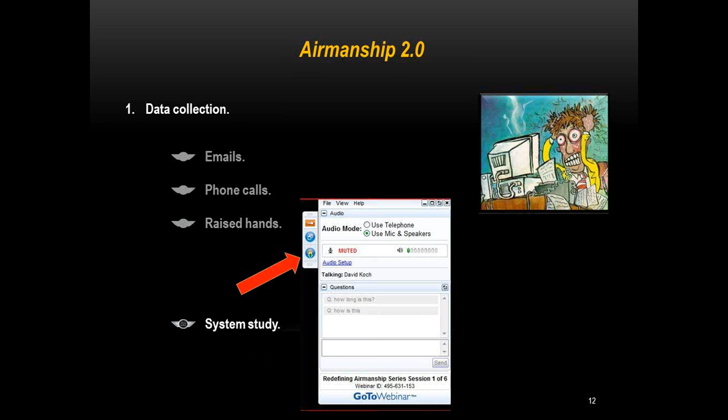So I eventually get to that. In fact, that's how we caught it. So I collected all that data, and then I also studied the system, the GoToWebinar system, to see what the problem was. Next step, as you recall, in a safety management system is data analysis.

So I crunched all that data and I looked at the system, as I mentioned. And here you can see a screenshot of what I see in my control panel. You all have a smaller version of this on your screen, or you should. But here's my icon to tell me my mic is hot, right there, that little green square with the white mic in it.

Here's another screenshot that shows me that mic icon when I have it muted. So it's not green now, it's gray. So it doesn't catch your attention. Pretty poor engineering in my opinion. When I have it muted, it's only gray and it doesn't catch my attention so that I know that I've done that.

So number 3 then, since we've analyzed the data, is to identify the hazard. The hazard is that I mute the mic button to clear my throat or take a sip of water, and I forget to open it back up again, and so we have lost comm. Everybody's saying, say again, and it was due to pilot error.

So we're going to devise a fix, working through our safety management system here. And the fix that I've decided to try is what I call the good old 3-holer trick. The 727, the Boeing 3-holer. I flew these for United Airlines starting in 1968, started out on this airplane as a second officer, and that's where I reached back in my memory bank, my Airmanship 2.0 bag of tricks, and pulled this one out, this fix that I'm devising here for this hazard that we've identified.

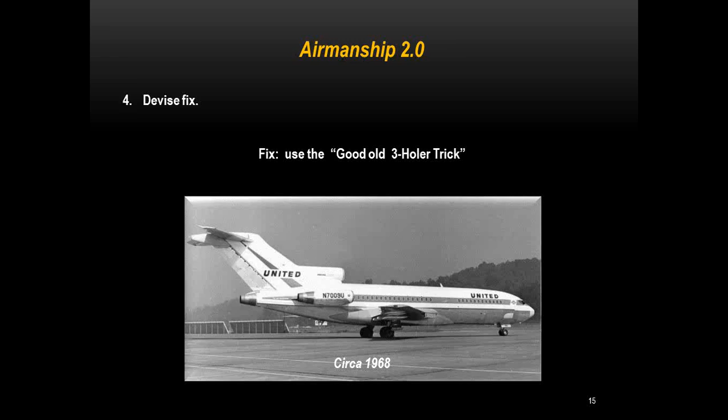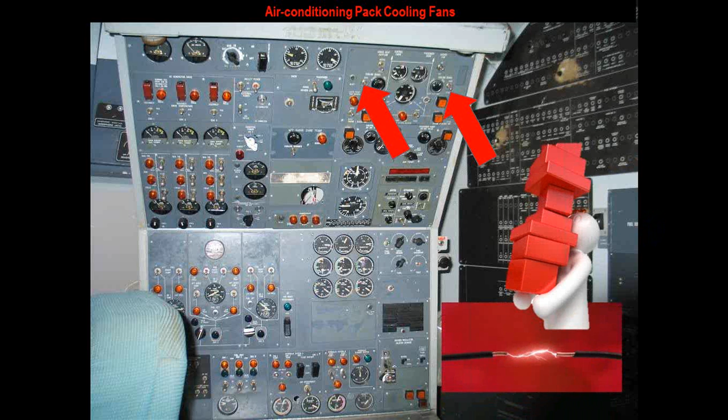These 2 switches are air conditioning pack switches, and attached to those air conditioning pack switches are cooling fans that are activated if those switches are on anytime the flap handle is moved from the 0 or the full up position. So anytime you start to extend the flaps, those air conditioning pack cooling fans come on, and they are tremendous users of electricity, take a lot of power.

So if we lost a generator on the 727, the procedure called for us to turn one of those switches off before we extended the flaps. If we lost 2 generators, procedures called for us to turn both switches off before we extended the flaps so that the cooling fans wouldn't come on.

So that was a real easy thing to forget. You might lose a generator at the beginning of a flight. You fly a long flight. Now you've got to remember to turn off those air conditioning pack switches before you extend the flaps. So what we did to remediate that hazard was, over the flap handle, we would put a coffee cup, just a paper coffee cup, upside down over the flap handle.

Whoever was going to be extending the flaps on that particular leg knew if they reached for them to extend them, they'd find the coffee cup, and then they would remind the second officer to turn the air conditioning pack switches off. So it worked very effectively.

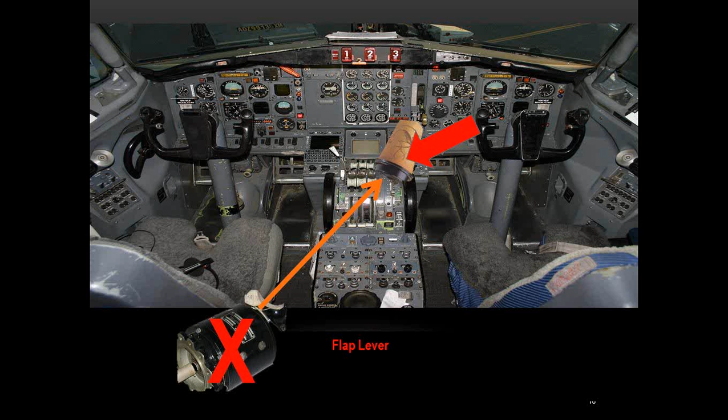I don't know who came up with this one first, but it was taught to us in recurrent training, actually initial, then recurrent. We all used it on the airplane as our gouge whenever we were handling a loss of generator situation. And of course, the big thing was to make sure you have those pack switches off.

So the fix I've devised, because I'm trying to keep myself from leaving the mic muted if I do mute it for some reason, I've decided to place in front of my monitor this Airmanship Challenge Completion Award that I happen to have here in my office. Whenever I have it muted, I just place this in front of the monitor, so I shouldn't miss that when I'm going to speak again and open up the mic.

All right, well, the next step is to implement the fix. So that's what we're doing this evening. I've got my Airmanship Challenge Completion Award here in front of me, and I'm going to put it in front of my monitor whenever I mute the mic.

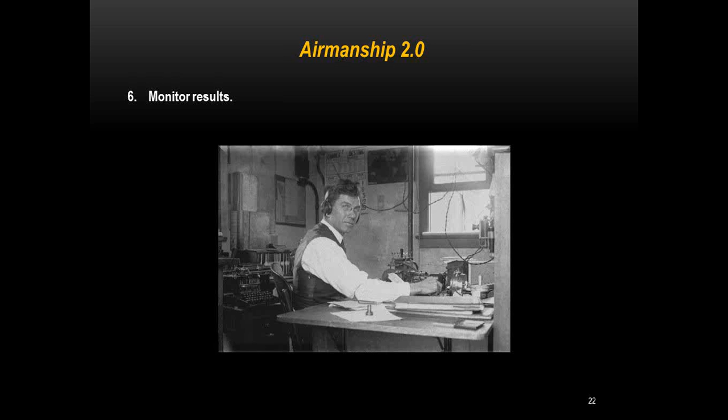Now the next step in the safety management system is to monitor the results. So you folks are the monitors, and again, if you have a problem, or don't hear anything for a while, please click on the raise your hand icon. You can email me, send me a message, or call me if you're not hearing anything.

So that's how a safety management system works under Airmanship 2.0, and we can use that same system in our flying to keep us safer and to make it easier for us.

A couple other things I want to tell you about Airmanship 2.0 briefly before we get into the case study this evening: I want to point out that we always use the Kern Airmanship model when we're talking about Airmanship 2.0. In fact, the Kern Airmanship model is the prism through which we view Airmanship 2.0.

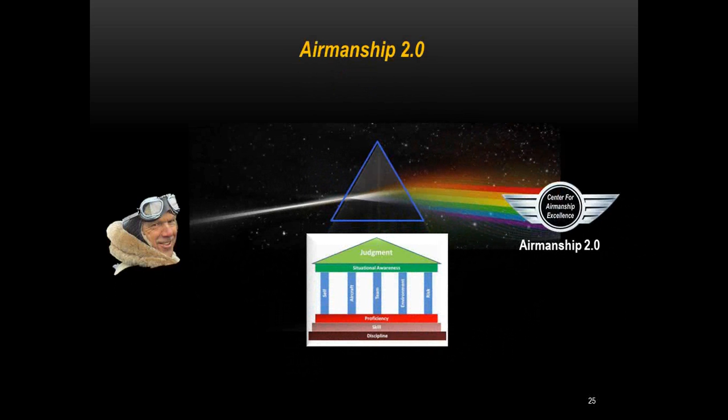Another way to look at Airmanship 2.0 in the Kern Airmanship model is to look at each one of the elements in the model. Here we can see we have 3 bedrock principles: flight discipline, skill, and proficiency. We have 5 pillars of knowledge: knowledge of self, aircraft, team, knowledge of environment, and knowledge of risk. And upon those 5 pillars of knowledge rest the desired outcomes, the capstone outcomes of situational awareness and judgment.

So really, the Kern Airmanship model is the scaffold upon which we build our airmanship skills and capabilities. Another way to look at Airmanship 2.0 is that it's doing it right. It's flying right. It's doing all the things that should be done to make the flight enjoyable, more rewarding, and safer.

Another big part of Airmanship 2.0, and you're kind of participating in an element of that this evening, is a continuous airmanship development plan. Every pilot who practices Airmanship 2.0 has a continuous airmanship development plan by which they can continuously improve their airmanship. I like to quote Vince Lombardi here: 'Perfection is not attainable, but if we chase perfection, we can catch excellence.' And that's what we're after here, to be excellent airmen.

I mentioned you're actually participating in a continuous airmanship development plan by attending the Wings Program briefings, because the Wings Program, the proficiency program, is a big part, or should be a big part, of everyone's continuous airmanship development plan.

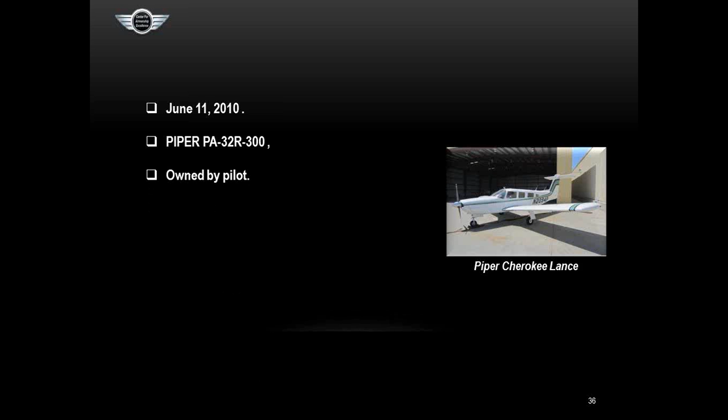It was owned by the pilot. It was a Part 91 operation. No flight plan was filed on the accident flight. There were 4 fatalities, all occupants of the aircraft, the pilot, and 3 passengers. The accident pilot was ATF Special Agent Jeffrey Ulrich. He was 50 years old. He had a private certificate with an instrument rating. 3rd class medical, issued 1.5 to 2 years before the accident. He had a restriction not valid for night flying, daytime only.

He had 2,150 plus hours, so he's an experienced aviator. 5.7 hours in the previous 30 days and 34.4 hours in the previous 90 days. So I would, from that particular information, assume that he was fairly proficient in the normal flying of his airplane. Passengers: his wife Ronnie, who was aged 47, daughter Alexa, age 15, and daughter Carly, age 5.

The aircraft, as I mentioned, was PA-32R-300. The N number was 7699er Foxtrot. Was manufactured in 1977, so it was 33 years old at the time of the crash. Total airframe hours, 4,389, so it was getting up there, relatively speaking. Had a Lycoming IO-540, 300 horsepower, so it had a lot of horses. The engine had been overhauled just 155.6 hours prior to the accident. Engines can be a problem no matter where they are in the life cycle, but this one at least was fairly fresh out of overhaul.

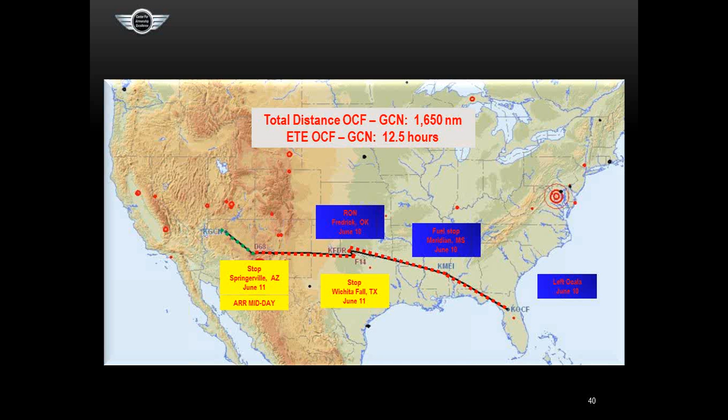They arrived in Springerville about midday. They were going to continue on up to the Grand Canyon. So total distance from Ocala out to the Grand Canyon, 1,650 nautical miles, 12.5 hours flying time. I would imagine this was a long-planned family trip, taking the kids out to the Grand Canyon. What a way to see it. What a way to see the country. I imagine they were just having a really good time when they arrived in Springerville for that fuel stop.

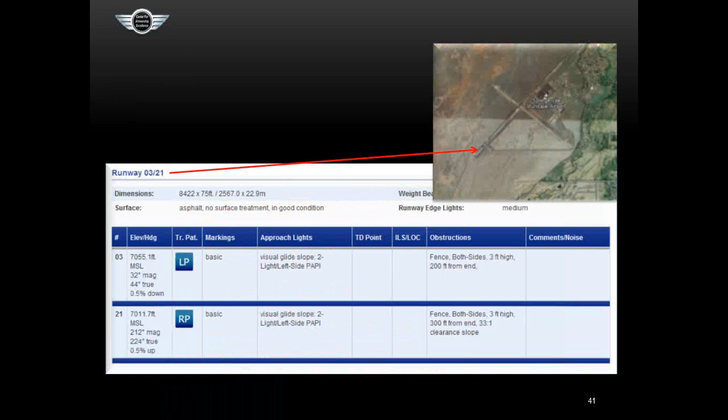Just take a little closer look at the airport, Springerville, where the accident occurred. You can see there's 2 runways at Springerville. This is runway 3-21, nice long runway. Had 8,422 feet, paved, good condition. 0.5% downslope, so a good runway to use. However, it was NOTAM closed at the time of the accident.

The other runway there, 11-29, it was much shorter, only 4,603 feet, and it had an upslope of 0.2%. Now that might not sound like much, but when performance is important, any upslope is a major detriment to performance. You might also note that the airport elevation here, at least the runway end elevation, 7,032 feet, so they're up there pretty good.

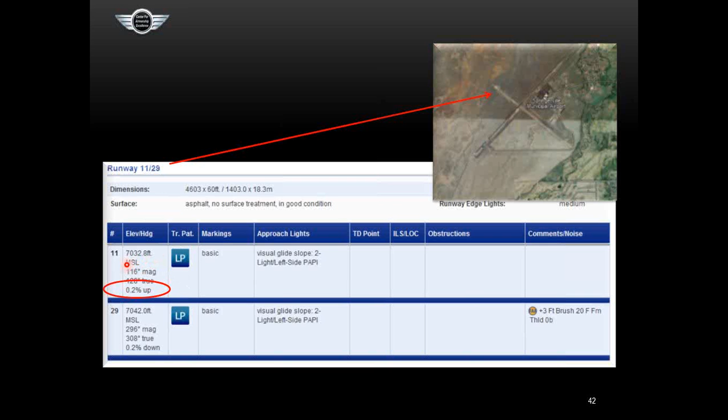On the turnaround there at Springerville, the records indicate that the pilot took on from a self-serve pump 76.4 gallons of 100 low lead. The aircraft held 98 gallons maximum, so that's pretty close, I would think, if he was topped off before he left Wichita Falls, and he had 20 gallons or so left there. 22 gallons is about right. A couple hours flying time, good margin. But he more than likely topped it off the way the NTSB figures it here.

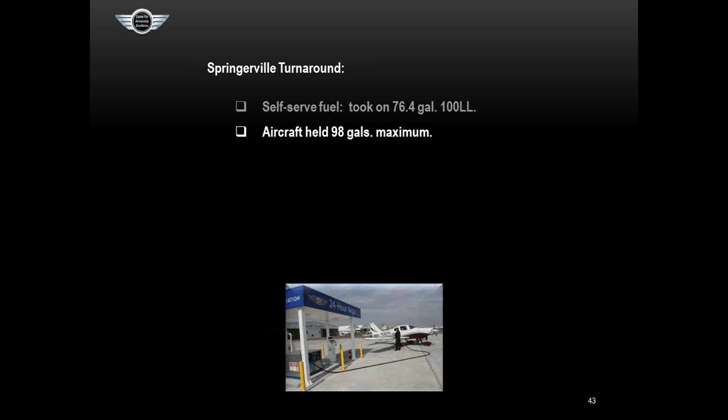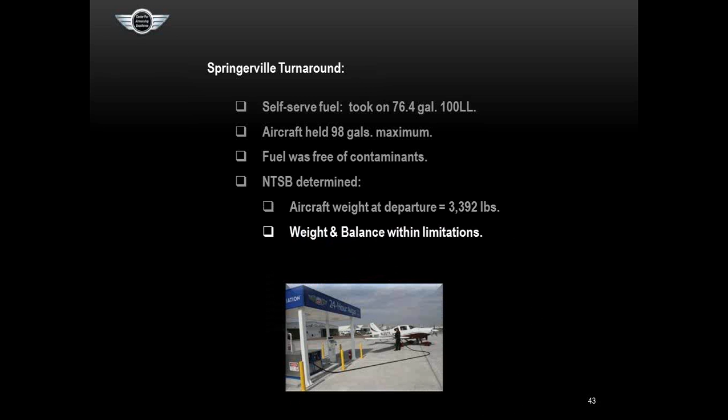But they did have the record, and they added 76.4 gallons. They did check the fuel. It was free of contaminants, so that wasn't the problem. The NTSB determined that the aircraft weight at departure was 3,392 pounds, and the weight and balance was within limitations. It was close to max gross. I think max was 3,600 pounds, but it wasn't at max, and it was in balance.

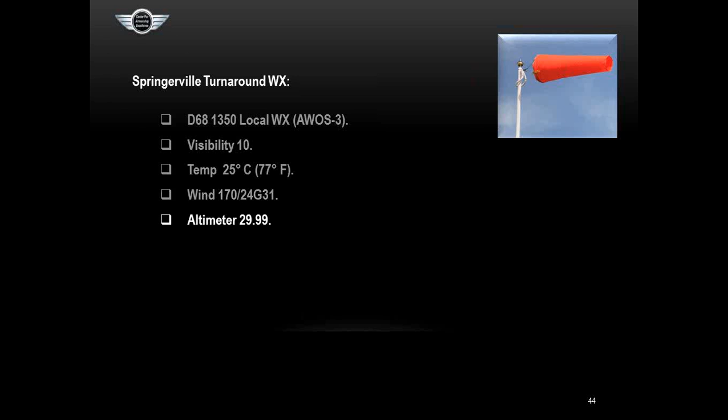The weather at the time of the Springerville turnaround at D68, that's Springerville, 1350 local time. It was recorded by an AWOS-3. Visibility 10 miles. Temperature 77 degrees Fahrenheit, so not terribly hot for Arizona in the summertime, but that is pretty high, 7,000 feet. I used to live in Tucson. I lived a couple thousand feet up, and it got hot in the summertime, even up at that altitude, but here's 77. The wind was from 170 degrees at 24, gusting 31. Remember, he's using runway 11. Altimeter 29.99. Density altitude 9,700 feet.

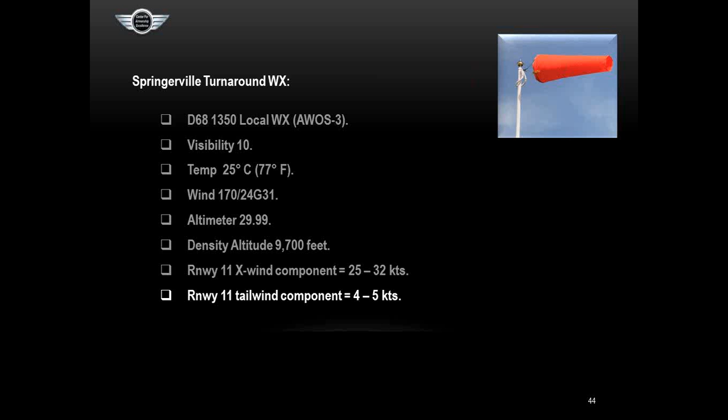The runway 11 crosswind component was computed by the NTSB to be 25 to 32 knots. That's the crosswind component. It had a tailwind component. It was gusting around, but most of the time it had a 4 to 5 knot tailwind component. So remember, you had that upslope on that runway. Now he's got a tailwind on the runway and a really ferocious crosswind to deal with. Must have been an interesting landing if he used 11 like he should have. The NOTAM said there was construction being done on the other runway, so I would assume he landed on 1-1. But we know that his takeoff was on 1-1 on this accident flight.

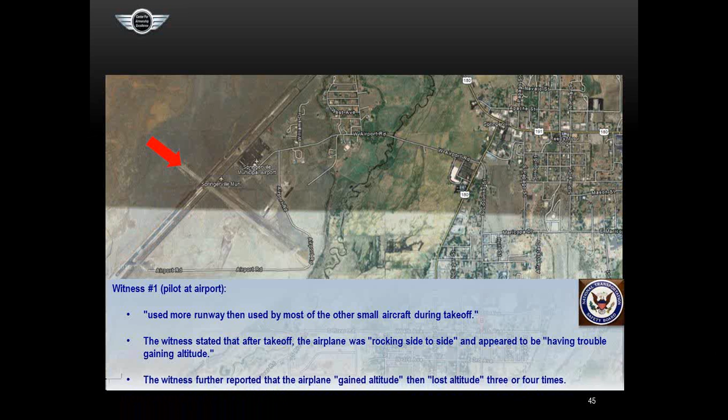All right, there were several witnesses to the accident. Witness number 1 was a pilot at the airport. He saw the airplane departing runway 11. And the quote was, "He used more runway than used by most of the other small aircraft during takeoff." The witness stated that after takeoff, the airplane was rocking side to side and appeared to be having trouble gaining altitude. This is a real strong indication that he was flying in ground effect and couldn't get out of it. The witness further reported that the airplane gained altitude, then lost altitude 3 or 4 times. Another good indicator that he was struggling to get out of ground effect.

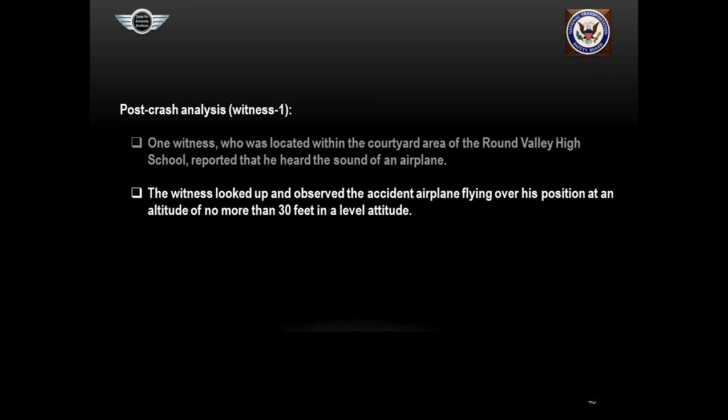Post-crash analysis, the NTSB interviewed a witness that said he was located within the courtyard area of the high school, and he reported that he heard the sound of an airplane. And then he looked up and observed the accident airplane flying over his position at an altitude of no more than 30 feet in a level attitude. The witness stated that he ducked for cover and subsequently heard the sound of the airplane impact the side of the school building. The witness said that the engine was wound up and seemed to be running strong.

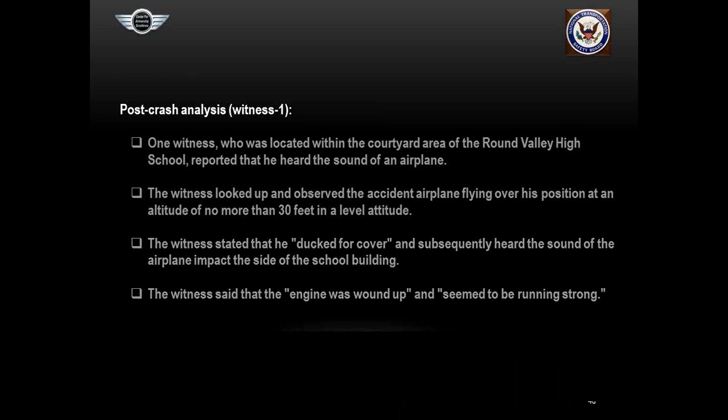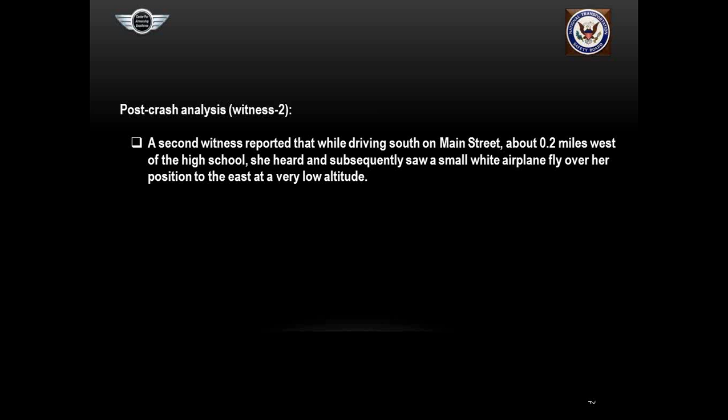A second witness reported that while driving south on Main Street, about 0.2 miles west of the high school, she heard and subsequently saw a small white airplane fly over her position to the east at a very low altitude. The witness stated that the airplane appeared to be losing altitude very fast as it flew over her position, and that it did not sound like the engine was sputtering or missing. The witness turned onto a nearby street, heading toward the high school, and observed the airplane turn its wings at an angle when it crashed into the roof.

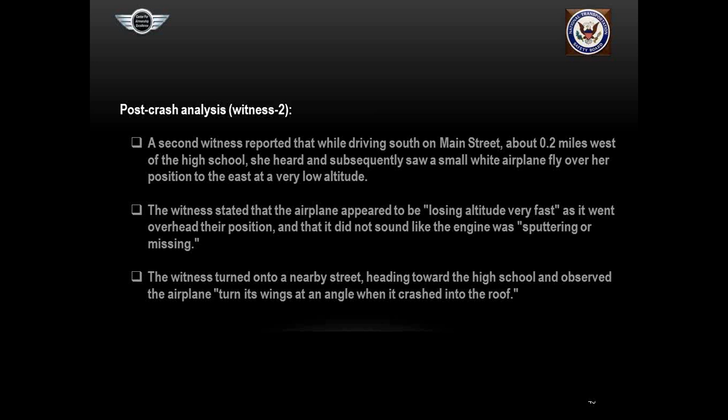But remember, it hit the tree first, so he might have not had good control by that point. So the question here is, did he stall, spin, or did he still have control of the airplane? He was just trying to avoid hitting something there.

A current copy of the aircraft's weight and balance, which would include empty weight of the airplane, was not located. Now, again, everything burned. They recovered a lot of the contents of the airplane, a lot of different paperwork. This guy was an ATF agent. There was a lot of ammunition on the airplane that cooked off for quite a while. They found several guns in his luggage, and they found some other documents, but they didn't find the weight and balance. So it might have been there, it might not. If it wasn't there, that, to me, is something to look at, because it's supposed to be there, right?

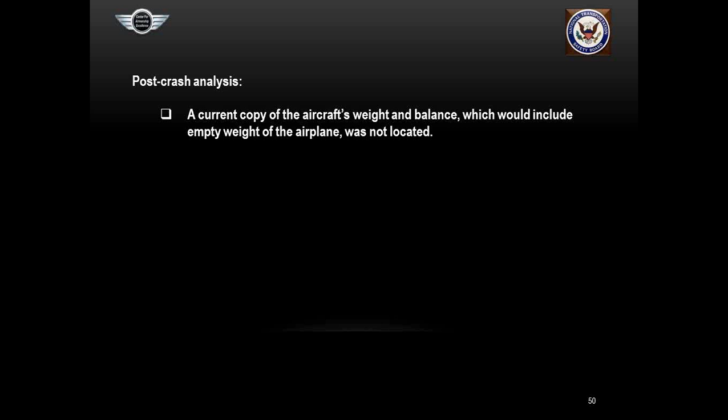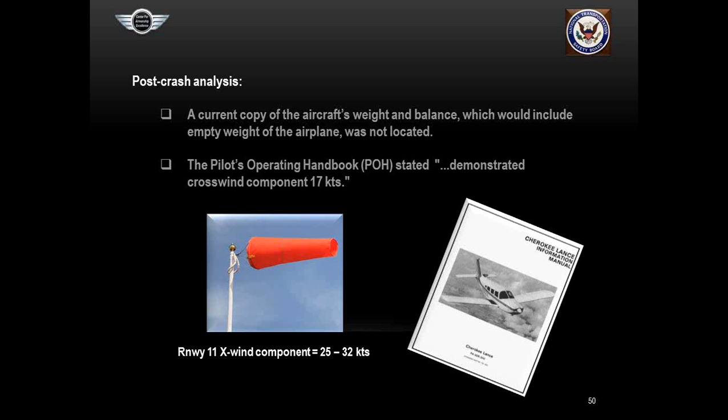The pilot's operating handbook stated a demonstrated crosswind component of 17 knots, and as we saw earlier, the runway 11 crosswind component was 25 to 32 knots. So if he remembered that, not a limitation, but it's a good personal limitation to have, probably even lower than that for most guys. But if he knew about it, he certainly ignored it, because he took off with a real strong gusty crosswind.

Stand by just 1 second. I want to check something.

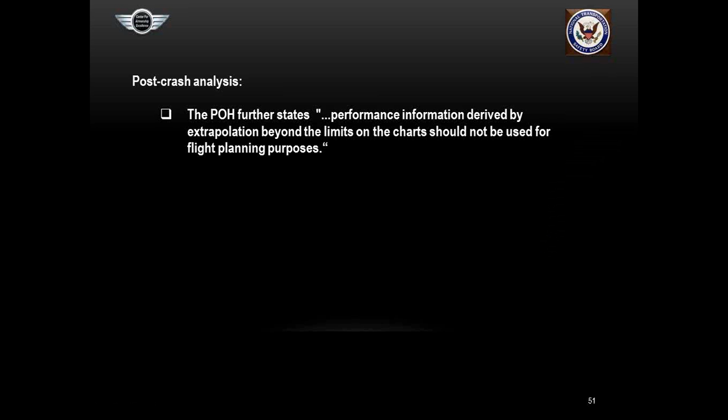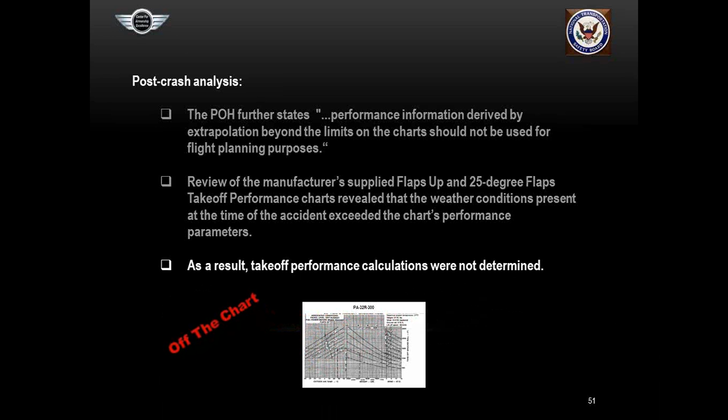Okay. The POH further states, performance information derived by extrapolation beyond the limits of the charts should not be used for flight planning purposes. So if it isn't on the chart, don't use it. Don't try to extrapolate. Don't try to figure it out. Review of the manufacturer's supplied flaps up and 25-degree flaps takeoff performance charts revealed that the weather conditions present at the time of the accident exceeded the chart's performance parameters. As a result, takeoff performance calculations were not determined. The data was off the chart.

Using the manufacturer's gear up and gear down performance calculation charts and the reported weather condition and maximum gross weight of the airplane, the climb performance with the gear in the down position was calculated to be about 90 feet a minute. So the book said the airplane should have been able to climb about 90 feet a minute with the gear down. With the gear up, it was calculated to be 410 feet per minute. Now that 410 feet per minute, by the way, if you look at an instrument departure procedure, the climb gradient required at about 120 knot ground speed, as I recall, is about 400 feet per minute to clear any obstacle out there in the departure path. So if he had the gear up, even at this high density altitude, he should have been able to climb.

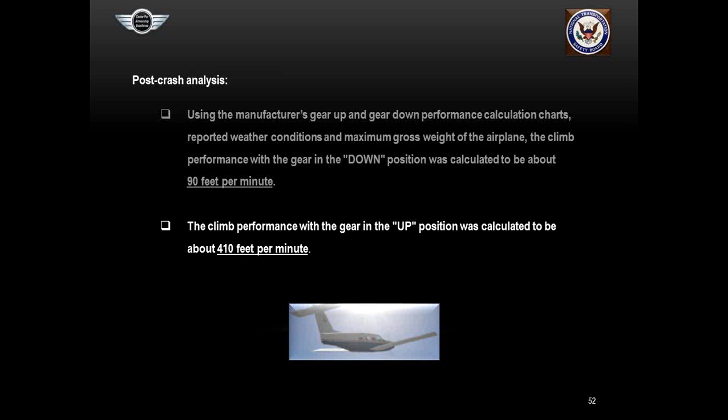And I can just visualize that. Got my family on the airplane. I just took off. The airplane's not climbing like I was hoping it would. I'm trying to fly it in ground effect and get it going fast enough to get it out of ground effect. I'm dodging things that are sticking up in the way, losing performance every time I do that, and just trying to get high enough to clear the highest thing out there in my departure path. Be a pretty tight situation.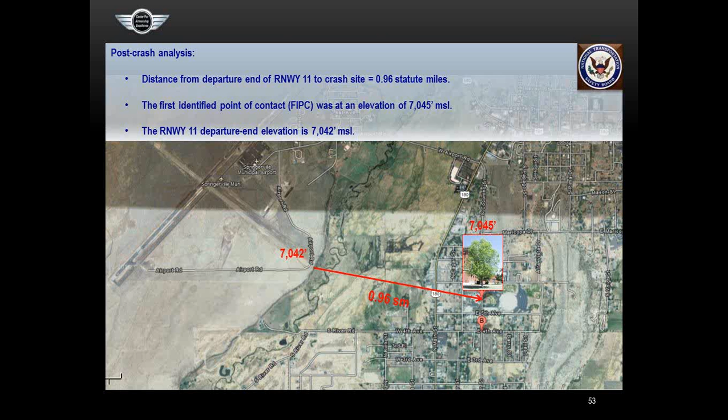Again, his first identified point of contact, the NTSB calls it, was that tree on the campus of the high school, and its elevation, they went out and checked it, was 7,045 feet MSL. That was where he hit the tree, that 7,045. The departure end of runway 11 is at 7,042 feet. So his net gain in altitude after takeoff was 3 feet.

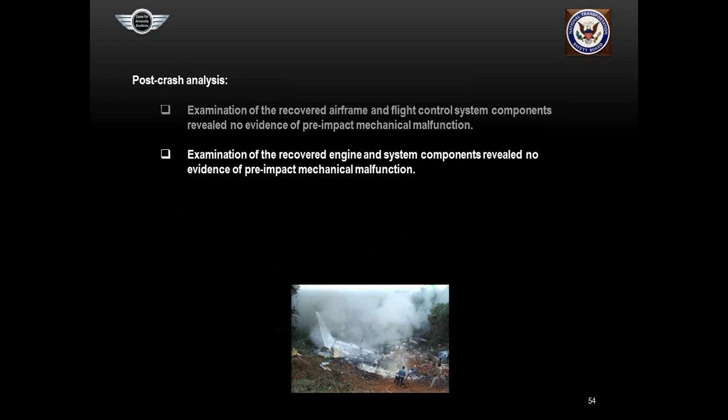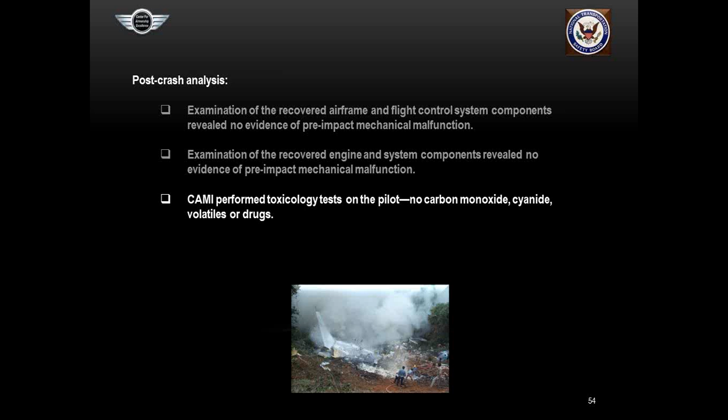Examination of the recovered airframe and flight control system components revealed no evidence of pre-impact mechanical malfunction. Examination of the recovered engine system components revealed no evidence of pre-impact mechanical malfunction. CAMI out at Oklahoma City, FAA, performed toxicology tests on the pilot and found no carbon monoxide, cyanide, volatiles, or drugs. So evidently he wasn't impaired by any of those things, although it could have been impaired by stress, could have been impaired by fatigue, other things will impair you besides drugs and alcohol and so forth.

The NTSB's probable cause that they issued: the pilot's operation of the aircraft outside of the manufacturer's specified performance limitations, which resulted in the pilot's failure to maintain clearance from buildings and terrain during initial takeoff climb. In other words, the density altitude got him.

All right, well, let's see if we can identify some of the links in the error chain that led to this accident. And to do that, I'm going to use the technique we used in the last webinar where we use what we call a whiteboard, but to do that here in this situation, I just use a Word document. So there's our whiteboard. So I'm going to open up the roster, and I'd like to ask you to contribute your thinking on links in the error chain that led to this accident. Just raise your hand if you have identified a link and you'd like to share it with us.

Well, either you all have gone to sleep or gone out to watch television.

Okay, here's Paul Galuzzo. Paul, can you hear me? Yes, I can. Go right ahead. I would say exceeding the crosswind component for the POH.

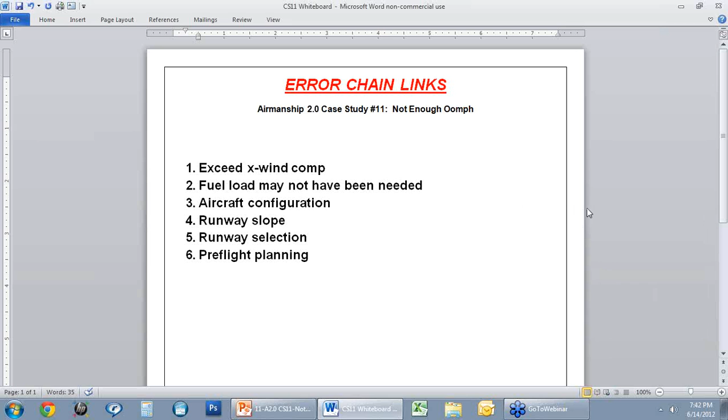And you're right, if he had known about it before - I've closed your mic, Larry, so don't get feedback - if he had known about it before, then he might have considered not using that as the fuel stop if he'd looked at any kind of performance figure. So very good, that's a good one, Larry.

All right, I'm going to scroll through again here a little bit more. Stephen Fisher, Stephen, I've opened up your mic. Okay, I don't hear you, Stephen, so close that again. Sometimes that's just the hookup, doesn't work.

All right, I don't see any more hands up. Oh, here's one more, Dean Cap. Dean, go ahead.

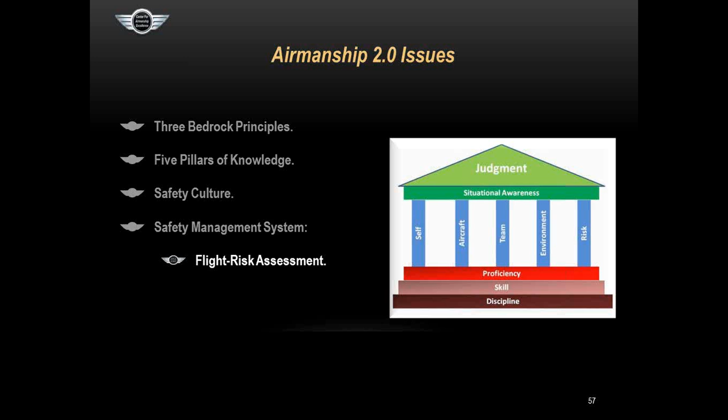First of all, a safety management system incorporates a formal flight risk assessment process, a tool, a system, people. I use what's called a FRAT, Flight Risk Assessment Tool, before every flight. AOPA has one online that's usable, not the greatest, but what it does is get you to identify, look at, and consider all the normal risks, all the known risks we can potentially see on every flight, assess them, and if they're at a high enough level, find ways to remove or mitigate it.

Also, if he was practicing Airmanship 2.0, he would have had thorough pre-flight planning because he would have been operating with an ops center, with an FAA licensed dispatch team and SkyDesk representatives, flight ops support, and maintenance support. So he's not out there alone. In this case, he was. He didn't have any backup.

And part of that safety management system would have been a policy that the flight will not depart unless the pilot in command and the dispatch team agree that the flight is safe. In this case, the dispatch team would have, by virtue of their normal procedures, computed the takeoff performance required and found that he couldn't take off from that runway that day, and they would not have released the flight, so it would have prevented the accident. That's shared decision making. In my opinion, after really studying this stuff now for the last 3 years or so, that's how we get safer.

How do we make ourselves safer so that we, our families, our friends and the folks that fly with us are safer and have a better time? And a big part of it is shared decision making.

I think about 80% of private flying accidents happen because of poor go, no-go decisions. And if you're using a system like Airmanship 2.0's shared decision making, we don't make these big decisions like go, no-go all by ourselves. We have a team around us to help us make the decisions.